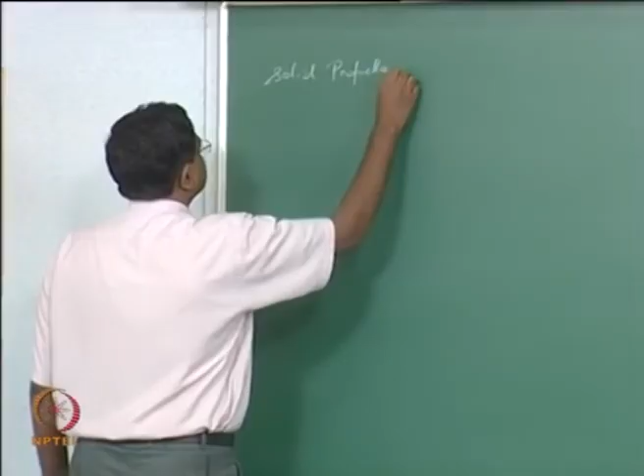The reason why we are going through all these things in quick succession is to point out that, as far as this course is concerned, whatever we have learnt on laminar premix flames and laminar diffusion flames is actually applicable, as we speak, in more complicated application oriented areas, except that the situation is complicated by a lot of other things.

For example, in sprays it's complicated by the spray statistics, the diameter distribution and so on. In the case of solid propellant combustion we will see what else happens, and then we will move on to turbulent combustion also, to show that the basics we have learnt will be applicable there, and how it's complicated by turbulence and so on.

So in the case of solid propellant combustion, what we need to understand is essentially we have to look at two cases. One is homogeneous propellants, and the other one is heterogeneous propellants.

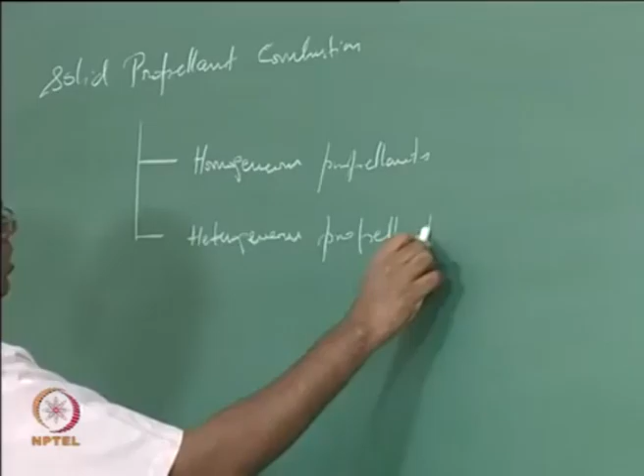The term propellant means that both the fuel and oxidizer are available in solid form together, and the question basically is to what level they are really mixed together. In the case of homogeneous propellants they are actually mixed up to the molecular level. So fuel and oxidizer are mixed at molecular level here.

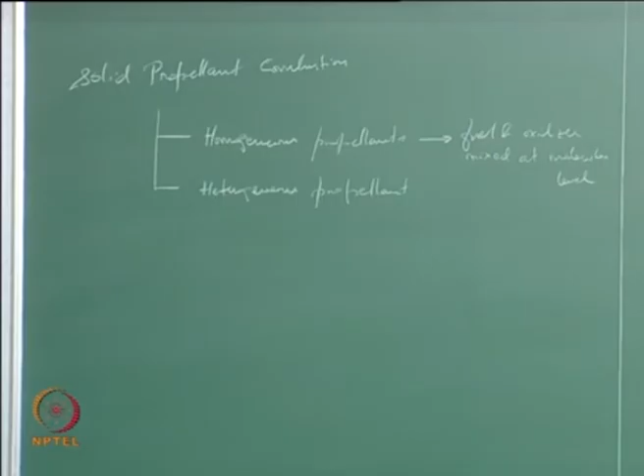That means when you have a source of heat that ignites it, and then combustion keeps going under steady state conditions, essentially what happens is the solid gets heated up and it is thermally unstable, so it decomposes into gas phase products. The gas phase products are essentially gas phase fuel molecules and oxidizer molecules, which then in turn break down further to react in a gas phase flame, and the gas phase flame releases a lot of heat that goes back to giving rise to the condensed phase decomposition products of fuel and oxidizer molecules in the gas phase. So that's how it happens.

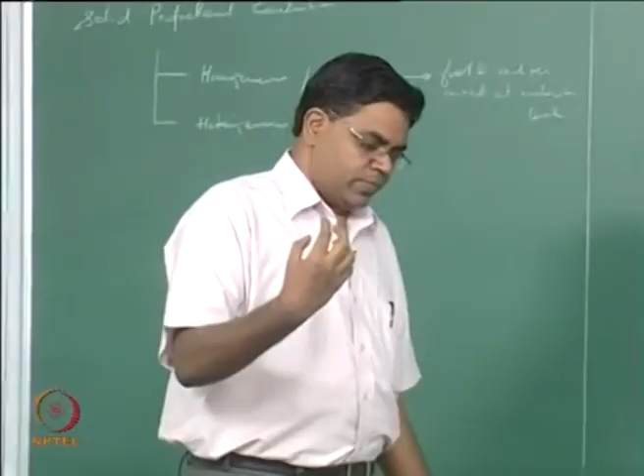As a matter of fact, when we look at liquid droplets, I also mentioned monopropellant liquid droplets, where you can actually have a premix flame surrounding the monopropellant liquid droplet, and it pyrolyzes the droplet, and the droplet decomposes into gas phase fuel and oxidizer molecules that react in the gas phase flame. So a similar idea essentially prevails for homogeneous propellants.

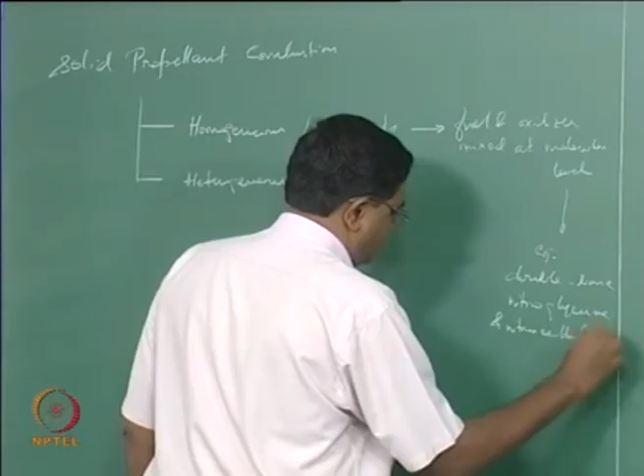An example of this, the most common thing, is what is called double base propellants. It's called double base because it's actually a combination of nitroglycerine and nitrocellulose. They are mixed together such that they form a mixture at the molecular level, and then they decompose into a gas phase fuel and oxidizer.

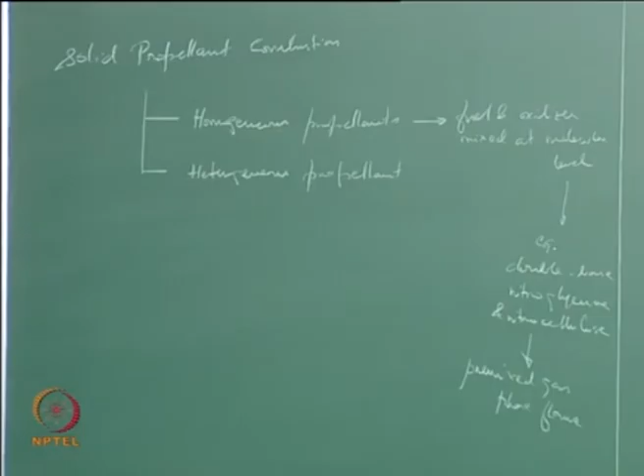On the other hand, before we move on to heterogeneous propellants, obviously what we are looking at here should give rise to a premixed gas phase flame, so you can think about a premix gas phase flame where the preheat zone now extends into the solid, because the preheat zone essentially is where the heat conduction happens, and the heat conduction now happens into the solid, heating it up from its initial temperature up to a surface temperature that needs to be determined.

This surface temperature is determined as part of the problem by supplying interface boundary conditions between the solid and the gas phase, and in addition you still have the same eigenvalue problem, which is to find out the burning rate of the solid, or the rate at which the surface regresses. That's essentially similar to the way we did the gas phase one dimensional flame structure analysis. In the case of heterogeneous propellants, essentially the fuel and oxidizer are mixed at a particulate level.

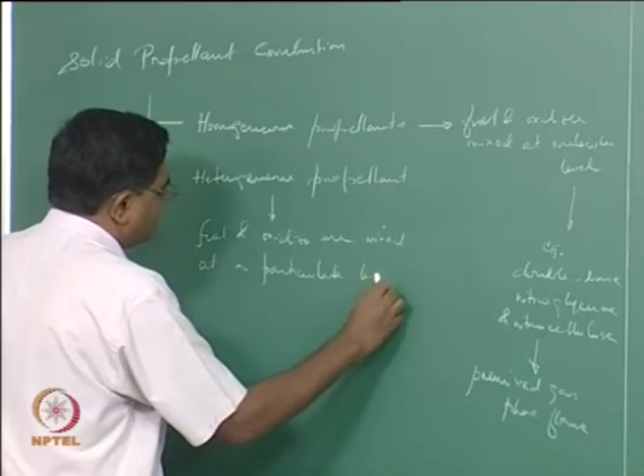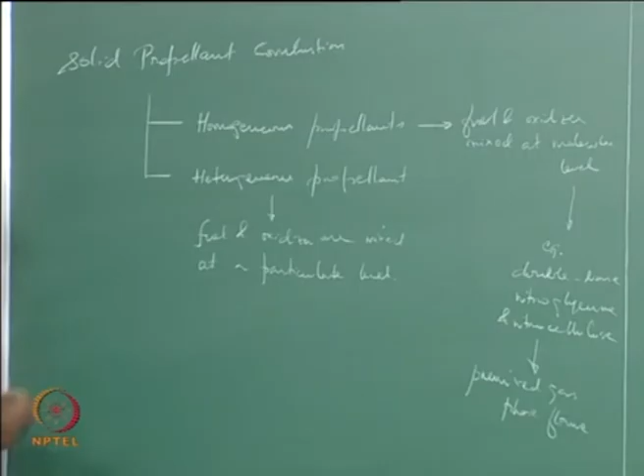That means you typically have - this is very typical, doesn't have to be followed exactly this way - a solid oxidizer powder, which is typically a chemical salt, and the most typical one we use is ammonium perchlorate. It looks like common salt particles, but comes in various particle sizes, and these particles are embedded in a polymeric fuel.

This starts out as a polymer that is a highly viscous liquid into which you mix things, and then you set this polymer to become a solid. So the fuel is essentially a polymer that also acts as a binder that binds the particles. You can also throw in metal particles as further fuel, but the metal combustion actually happens outside of the combustion between the fuel and oxidizer - effectively the binder and the oxidizer.

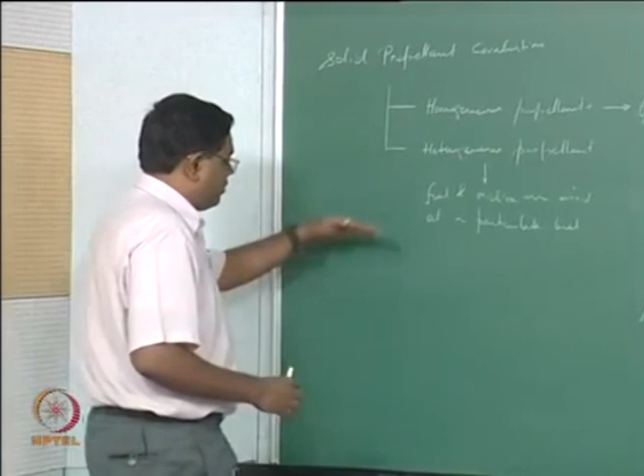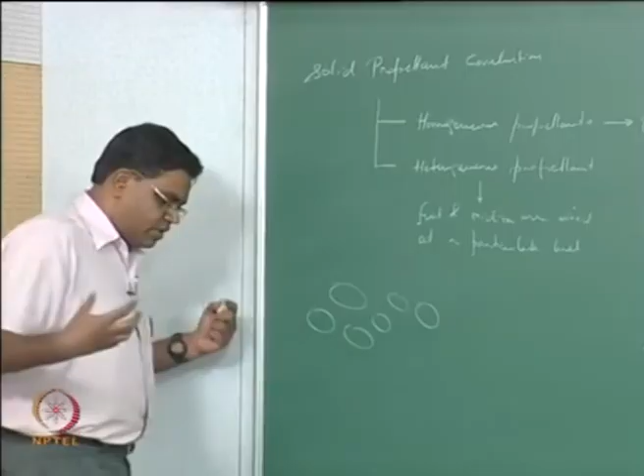So effectively what we are looking for is the combustion that propagates the flame into the solid, caused by a flame between the fuel and oxidizer. This will have a lot of solid particles, typically about 200 to 300 microns in size. Finer ones could be as fine as 5 microns or even 1 micron in extreme cases, but typically it's about 50 to 80 microns, maybe at most 100 microns. So essentially you try to have a very tight pack of a lot of large solid particles.

Then you try to pack further, in between the crevices formed between these big solid particles, with further smaller particles. So now you get these particles, and you have a binder that's binding the whole thing together.

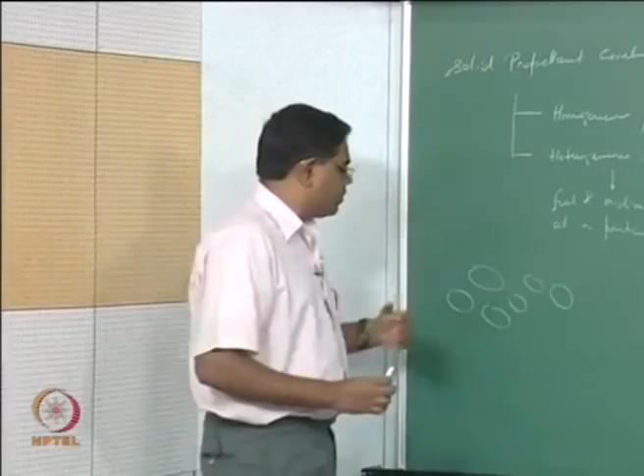So microscopically, when you have a flame that is trying to eat into this, it's obviously not going to be a premix flame. Even at the microscopic level, let's suppose we can hypothetically cut it with a surface like this, and say that is now the burning surface. Obviously the burning surface is not going to be as flat as this, and we will see how the non-planarity develops, but let's suppose this is what we want to think about.

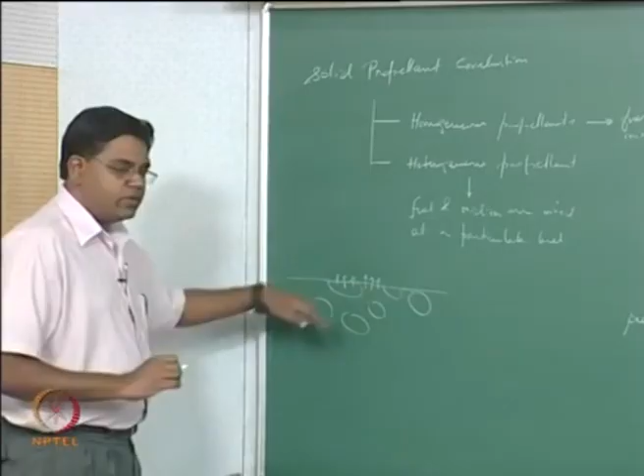Now you have an exposed area of oxidizer giving rise to oxidizer vapor, and an exposed area of binder giving rise to binder fuel. So let's say fuel here, oxidizer here, fuel here - if you look at it like this, within this region it's sort of like the inverse of the Burke-Schumann problem. The Burke-Schumann problem had fuel in the core and oxidizer on the sides, but if you don't care about exactly which chemicals are used, we're essentially looking at two different reactant species coming out in this fashion.

So we expect to actually have a diffusion flame associated with this. Recall we talked about flux boundary conditions, so we can deliberately discuss where exactly the stoichiometric surface is going to attach - is it at the contact between the oxidizer and fuel, or away? These kinds of issues remain to be discussed in these problems.

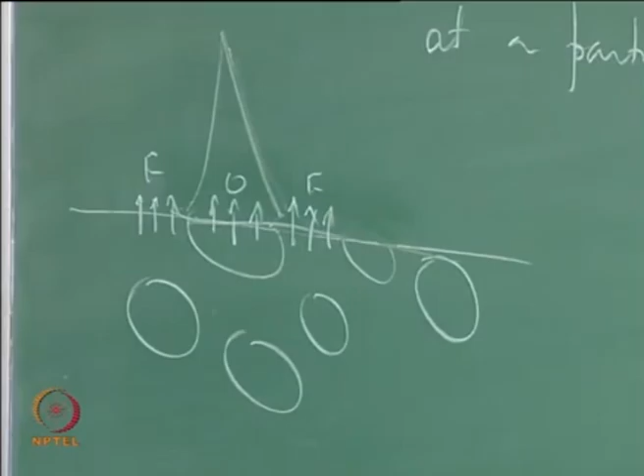But we also talked, when discussing diffusion flames, about finite chemistry effects, particularly near the leading edge, and found that we need something like a leading edge flame or a triple flame structure. That's pretty much expected in these propellants, because it turns out the oxidizer is actually a monopropellant by itself - it can burn on its own, but we need the binder to hold the oxidizer particles together and push it closer to a stoichiometric situation. Therefore you essentially have an oxidizer-rich reactive mixture.

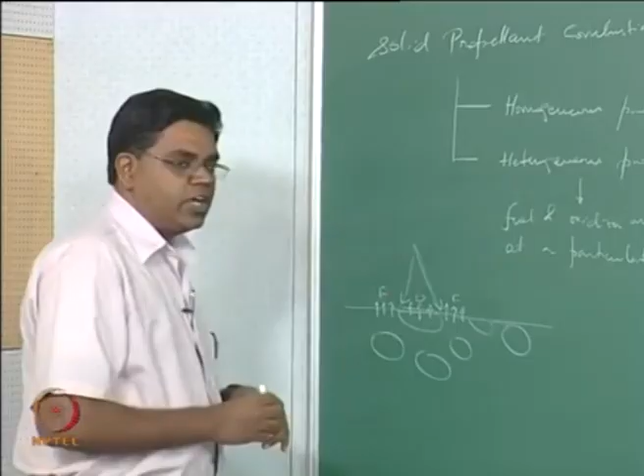In fact it can also go through a self-deflagration - you do have a self-deflagration flame of the oxidizer very close to the oxidizer particle, out of which you get oxidizer-rich products of this flame, which mix with the binder fuel gaseous species. Since you now have an oxidizer-rich species, you're going to have more like a triple flame rather than a diffusion flame that extends all the way.

So typically modelers have identified that you have a monopropellant flame for the ammonium perchlorate, then what's called a primary flame in the diffusion flame that comes from the triple flame idea at the corners, and then the trailing diffusion flame. So a typical idea of multiple flames prevails for what is called composite propellants.

Heterogeneous propellants are also generally termed composite propellants because they are a composite of particulates in a binder, similar to composite materials and structures. The popular idea is that you have essentially multiple flames of different structure that prevail on top, and of course, as I said, you also have aluminum metal particles that are embedded.

Aluminum is thermally very stable, therefore as it comes out it's going to accumulate on the burning surface because it is just barely getting melted there at that time. It is not ready to actually get evaporated.

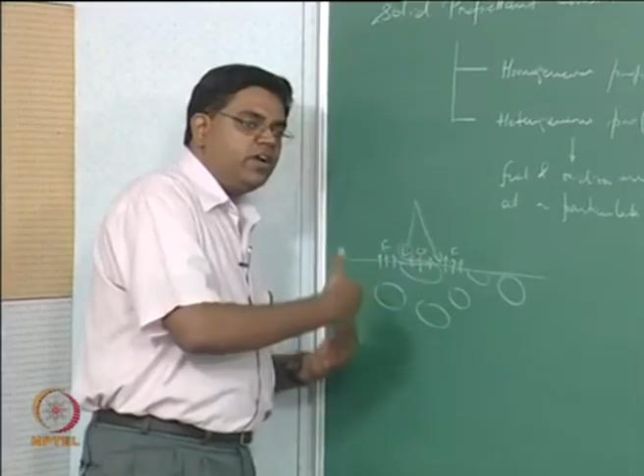So as it gets accumulated, it now forms a sintered web, and it's getting heated up by this gas phase flame complex, and ultimately it reaches an ignition temperature by which it gets ignited. Then the sintered web rolls out and goes up and starts burning as a bigger agglomerate than the individual particles we originally had. That's a complex problem with a lot of ramifications in solid rocket performance where these kinds of propellants are used.

All I want to point out is we have discussed many of these issues earlier on when trying to do laminar flames, and all these ideas actually remain here as well. So we now want to do a similar kind of overview of turbulent combustion.

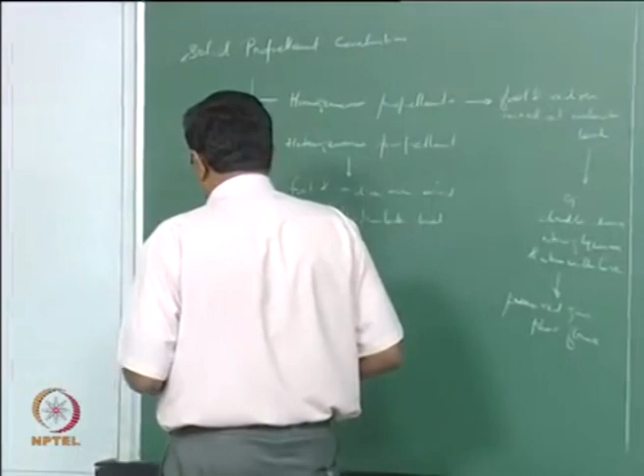To say that we want to just give an overview of turbulent combustion is extremely unfair, because it is a subject that has spawned a huge amount of literature. A lot of scientists have been working on it, and turbulent combustion is one of the things that has funded a lot of combustion research in the last many decades.

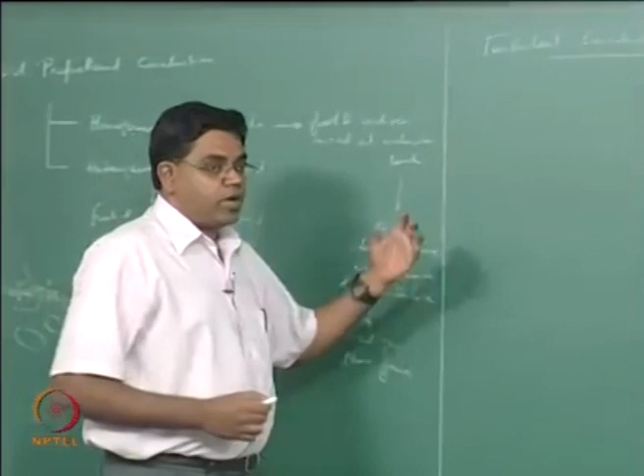That is primarily because most practical combustion, barring some things happening at very microscopic scales with very small Reynolds numbers, is turbulent in nature. So we are looking at gas turbine combustors, liquid rocket combustors, furnaces, boilers and so on. In most combustion situations you encounter, you have turbulent flow.

So effectively, here again, just like how we did sprays, first we have to get a hang of turbulent flows before we can actually get into the combustion.

When we did sprays, you remember, we had to first talk about spray statistics: how do you characterize sprays, how do you describe sprays, and then we worried about the combustion. Similarly, we have to go back a little bit and get a quick overview of what is turbulent about turbulent combustion.

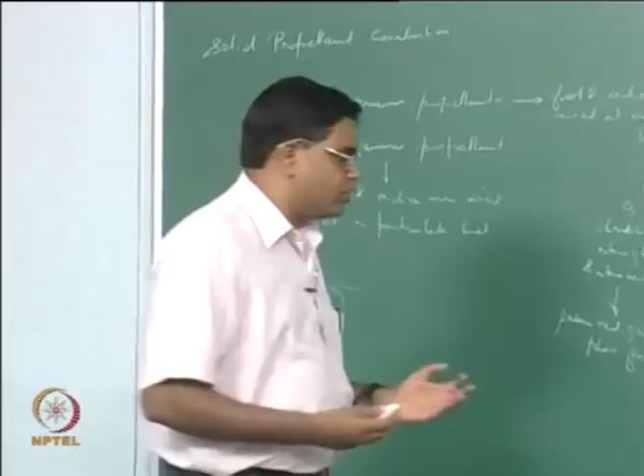So that means we have to look at what turbulence is in general. We will try to restrict what we are doing here to the context of turbulent jet flames. When I say turbulent jet flames, I will talk about both premixed flames and non-premixed flames, and let's see what that means.

So consider turbulent jet flames is what we want to do. This is very generic, because what you can think about essentially is if you now have a little nozzle from which a gas comes out at turbulent speeds, and it flows out like a jet, with a lot of eddies here and there. It's a caricature that I don't want to elaborate too much. So you now have a large turbulent jet.

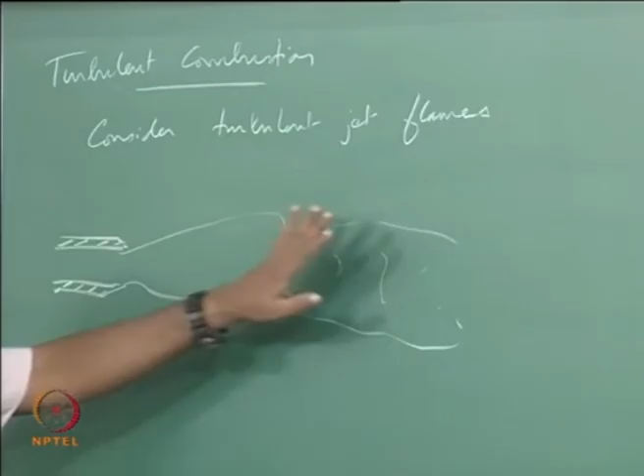You can think about this as coming out of a burner that is fitted to a combustor or a furnace and so on. This is a very practical situation that you come across in many applications.

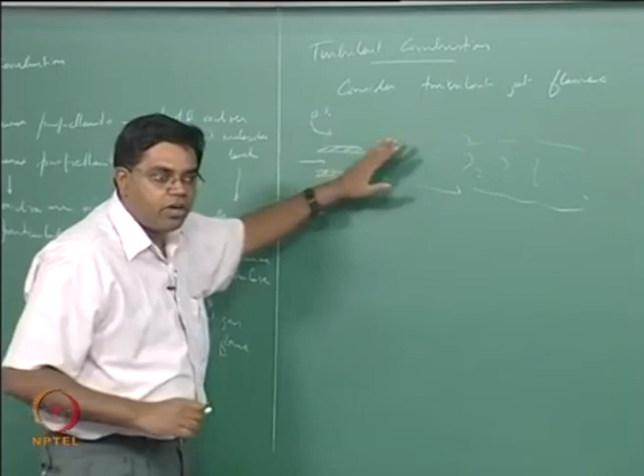When you say turbulent premix flames, you could think about a reactant mixture coming out here and then letting in air from the sides entering into the jet. Or if you want to think about a turbulent non-premix flame, you could say I have only fuel coming through this, entraining air around, and then you have a flame. So either way, depending on how that happens.

So if you now have premixed reactants, you're going to have a highly wrinkled premix flame that burns and consumes all the reactants within a very short distance.

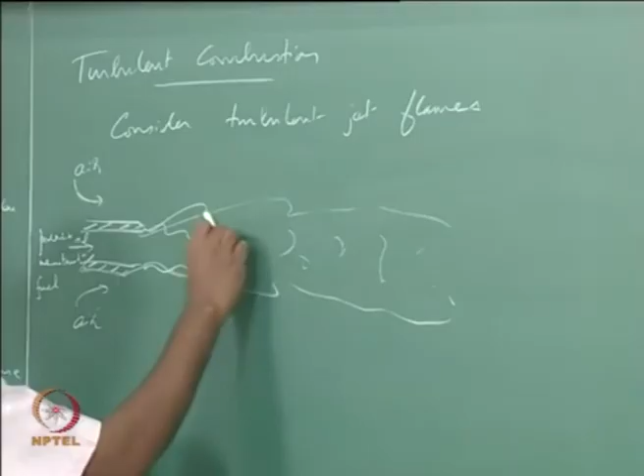And once again recall, if you now have only fuel, you're going to have a diffusion flame. The picture that I'm drawing there is essentially something like the stoichiometric surface.

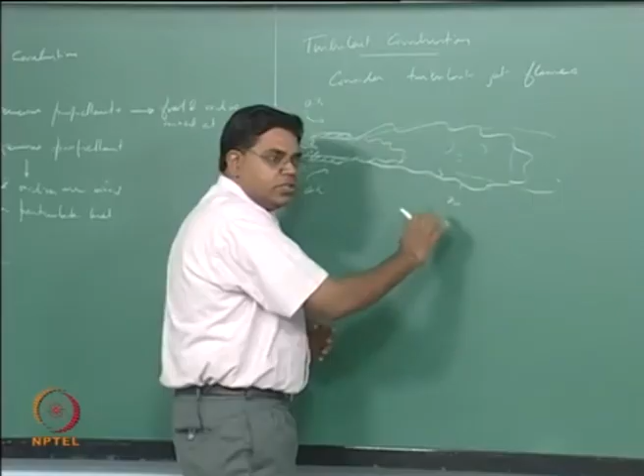Just like we did with the Burke-Schumann problem, if it's possible, mark the contour corresponding to the stoichiometric mixture fraction. You now get a turbulent flame. What's turbulent about it? You have fluctuations that keep happening, so the next snapshot won't exactly follow the same contour. This is an instantaneous picture, so each snapshot is slightly different. If you keep taking these snapshots and overlay them, you get lots of these curves forming a band, which is what you'd call a turbulent flame brush, causing a brush-like structure in an ensemble averaged manner.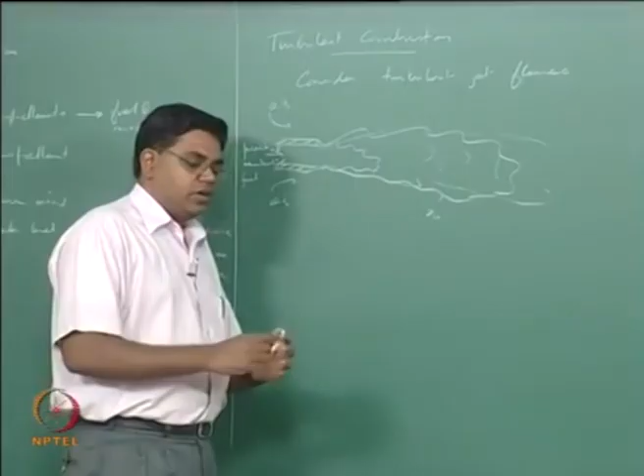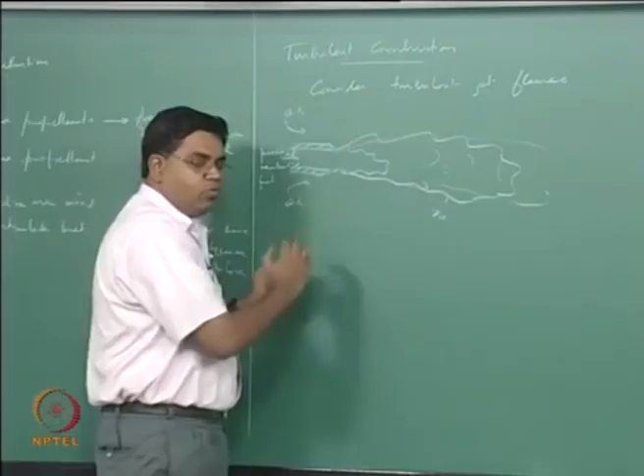Similarly for the premix flame, let's think about the laminar situation. We talked about the Bunsen burner experiment, where you have a hole at the bottom allowing air entrainment, setting up a premix flame, then gradually closing the hole to convert the premix flame into a diffusion flame. We find the diffusion flame is a lot taller compared to the premix flame. A similar situation exists for turbulent flames, because in diffusion flames combustion is diffusion controlled, so heat release isn't as intense since the chemical reactions are waiting for mixing to happen. Whereas in the premix flame, heat release is kinetically controlled, so you get a lot of heat release within a very short region. The volumetric heating load from a premix flame is much higher compared to a diffusion flame.

For this reason, for the same thermal loading - meaning the amount of fuel you're trying to burn at a particular rate - premix flames are typically very compact compared to diffusion flames. This is true in laminar as well as turbulent flows.

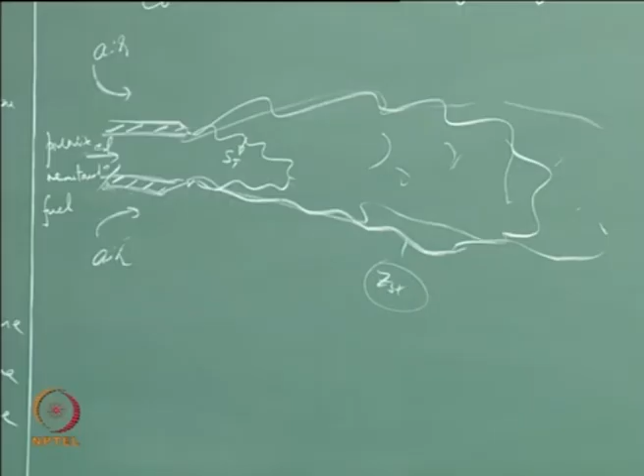If you want to think about how, just like the stoichiometric surface for the diffusion flame, you could think about a local turbulent flame speed trying to match the flow and set itself up. There we have a little problem: am I saying this instantaneous flame is traveling at a turbulent flame speed, or is it the turbulent premix flame brush that's traveling at a turbulent flame speed? So the notion of turbulent flame speed is a bit difficult to think about, and we'll have to discuss it in greater detail.

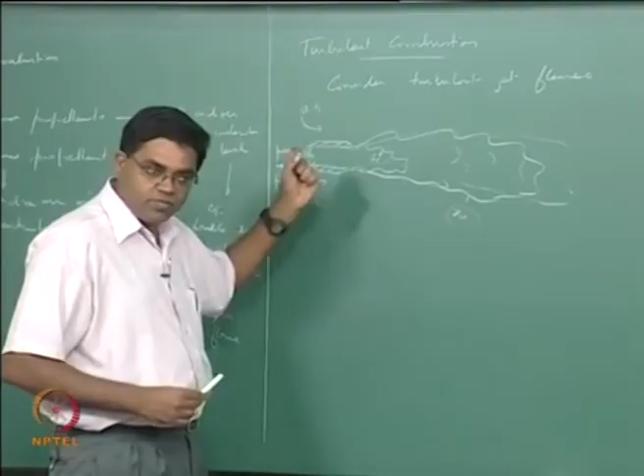The first thing I'm hinting at is that we will now have to talk about something called a turbulent flame speed, as opposed to a laminar flame speed. We got a hint of it when we used S_L, where L indicates laminar, and I pointed out that for turbulent flames we'll have to alter that. The point I'm trying to make is that the ideas we had - like the flame speed balancing the normal component of the flow - those ideas will remain. That is not going to change.

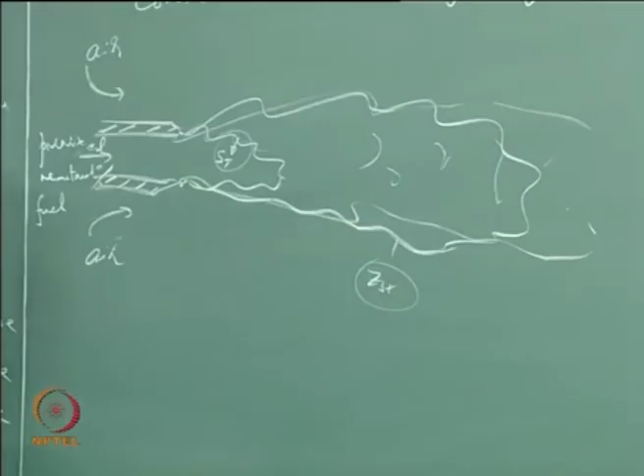So if we want to think about all this, the first thing to do is forget about the flames for a moment. We will now look only at the turbulent jet. For the sake of looking at the turbulent jet, let's not worry about whether this is premixed reactants or fuel - we'll simply say it's just a jet of some gas, maybe air itself, in a quiescent air ambience. That means you're essentially looking at a jet.

In the jet, you now have a region that's like an unsteady shear layer, where you have two mixing layers. We're talking about momentum mixing, species mixing, and thermal mixing if it's not isothermal. All these things are happening within this region in an unsteady manner. You could hope to view this part as essentially an unsteady laminar case if you're trying to resolve these scales in your computation or whatever it is.

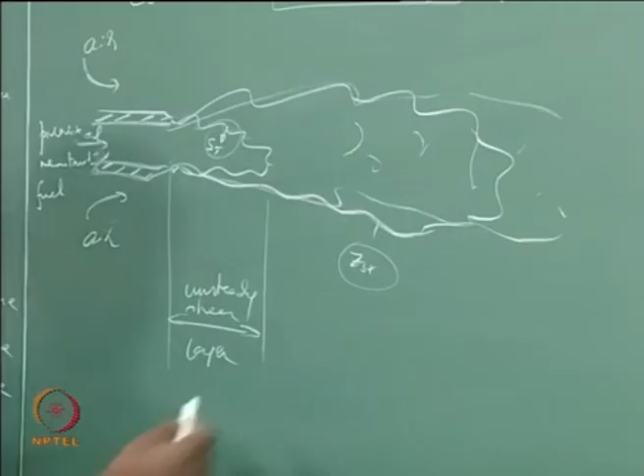But pretty quickly you're now going to get into a region where you transition to turbulence, and beyond this point you now have a fully developed turbulent jet.

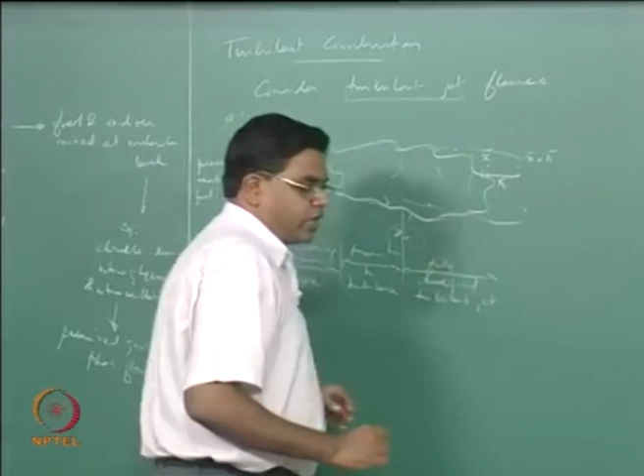When you have a fully developed turbulent jet, we are looking at a lot of eddies, which are primarily homogeneous isotropic. So we consider a point given by x and another point given by x plus r, distant r apart, then we characterize this by having a cross correlation between the two.

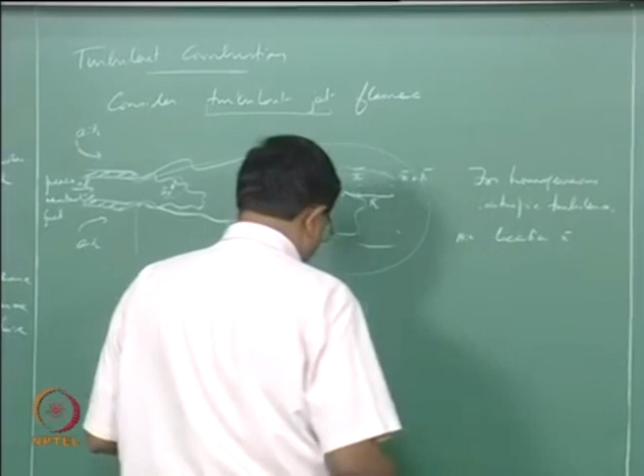Now if we're looking at this region of fully developed turbulence for homogeneous isotropic turbulence, the location x doesn't matter. Location x is arbitrary, and all you're looking at is essentially the actual distance rather than the displacement. So you don't have to look at this in vector form. The direction didn't matter because it's isotropic, and the location didn't matter because it's homogeneous.

Therefore, r can be replaced by mod r, which is simply r without the vector, and then what you're looking for is a velocity correlation.

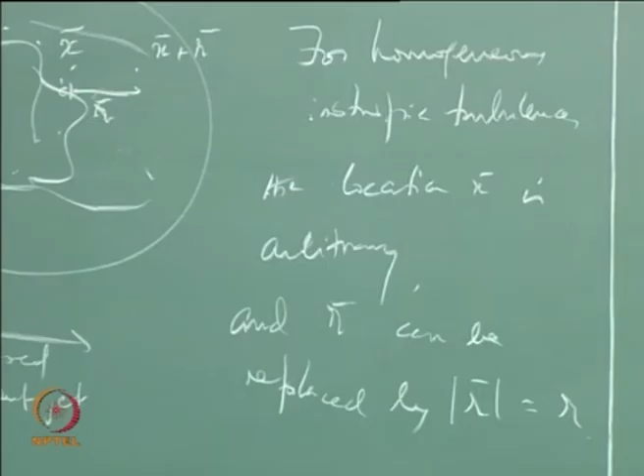So the starting point of thinking about turbulent flows is to think about a velocity correlation here, that is a spatial correlation. That means you're essentially looking at turbulent fluctuation at x comma t correlated with the turbulent fluctuation at x plus r comma t, as an average.

Then you normalize this. So the normalized correlation f of r comma t then is just take the correlation r and divide by the RMS, u prime squared t the whole bar.

And why are we bothered about this? Because we want to step into how this looks like. So if you look at how f of r comma t looks versus R, it's normalized, so we don't have to worry about the magnitude.

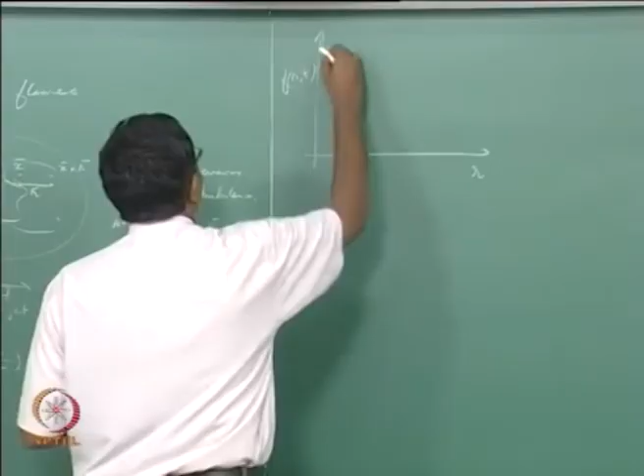It goes asymptotically to 0 as you go further out in R, and with respect to this we could say somewhere along here we have a length scale eta, which we call the Kolmogorov length scale, and somewhere in here we have a length scale L, which we call the integral length scale. We'll talk about these more carefully later.

But what I'm interested in is a function that approximates this to good measure, and that would be 1 minus 3/4 c over k epsilon r to the 2/3, where k is what is called the turbulent kinetic energy.

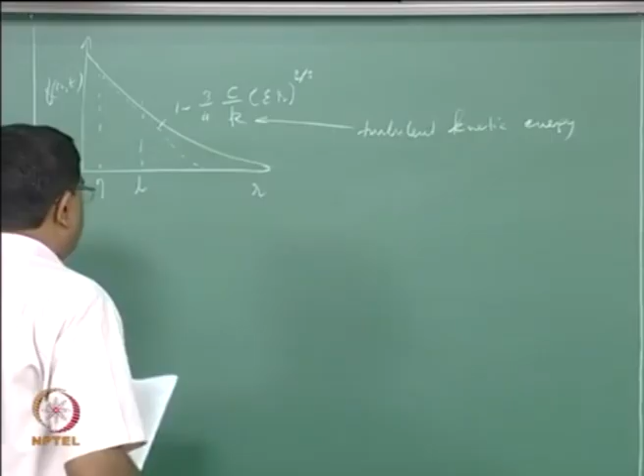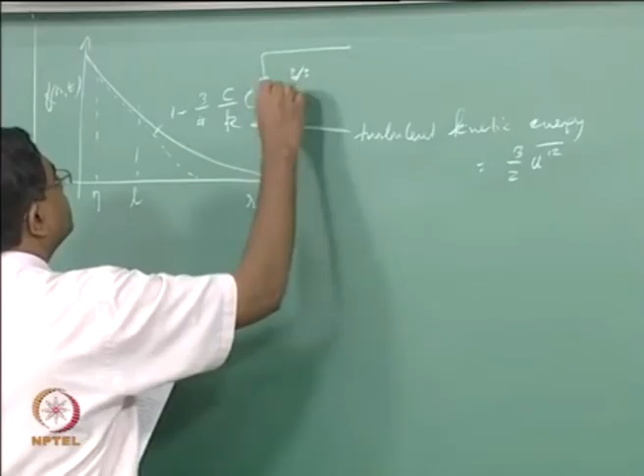For isotropic turbulence, this is equal to 3/2 u prime squared, where u prime is the fluctuation over the mean of the velocity, and epsilon is the dissipation, and c is what's called the Kolmogorov constant.

Kolmogorov constant, and then we want to talk about what is the integral length scale. Integral length scale L of t then is the integral from 0 to infinity of f of r comma t dr. That is essentially the normalized correlation integrated over all distance, and then you get a measure of a scale that captures the large scale structures.

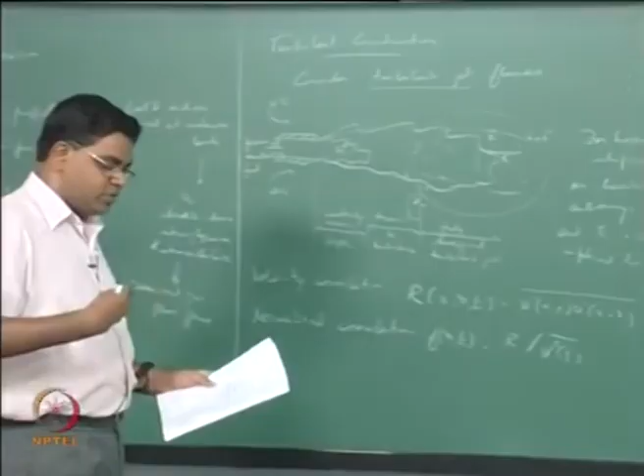We'll see what that means pretty soon. Then you have what's called the Kolmogorov length scale, which is the smallest length scale in your flow. Essentially what's happening is you have a turbulent flow in which you have a cascading that goes all the way down to the Kolmogorov length scale. So eta is nu cubed divided by epsilon, the whole to the 1/4, where nu is the kinematic viscosity, and epsilon is the turbulent dissipation.

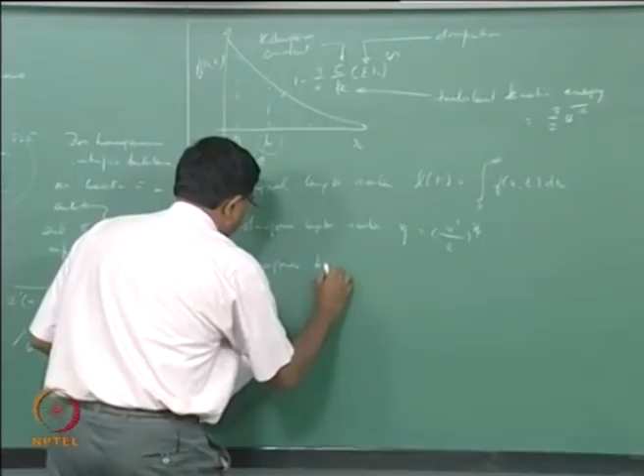We will also talk about a Kolmogorov time associated with the length scale, and we will talk about these time scales and length scales and the velocity associated with these for many of these scales, but at the moment we are discussing the Kolmogorov scale. So Kolmogorov time t eta is nu over epsilon to the half, and Kolmogorov velocity v eta is nu epsilon to the 1/4.

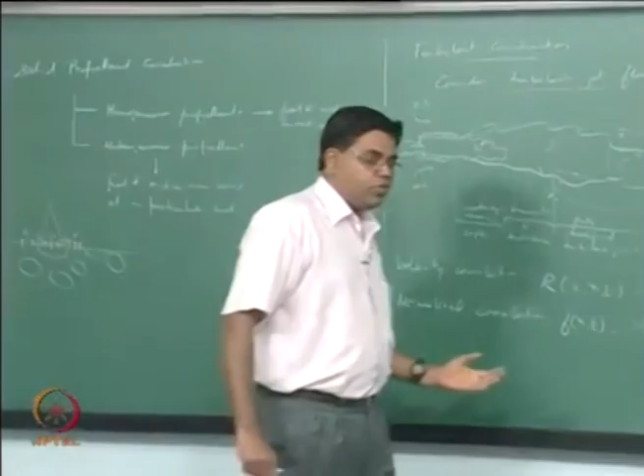Between the large scale and the Kolmogorov scale, we could now think about a discrete sequence of eddies, and the reason we are talking about these things is because ultimately we want to compare them with a laminar flame thickness. When we talk about combustion, we have length scales and time scales associated with the flame and the flame speed. So we want to be able to compare these scales with those of the flame, so we now talk about a discrete sequence of eddies.

Discrete sequence of eddies within what's called an inertial subrange. I'm going to explain this soon.

With the energy spectrum, but let's first, it's kind of like a chicken and egg thing. We first have to talk about the cascade and then the spectrum, or vice versa.

This is basically L divided by 2 to the n, where, until we reach eta, n goes as 1, 2, etc. That means for every eddy size, it's half the size of the previous, bigger eddy. Essentially that's how we keep on looking at a discrete sequence.

And what we can find out is that in this inertial subrange, the dissipation remains constant. You have a constant dissipation mechanism that works on these eddies.

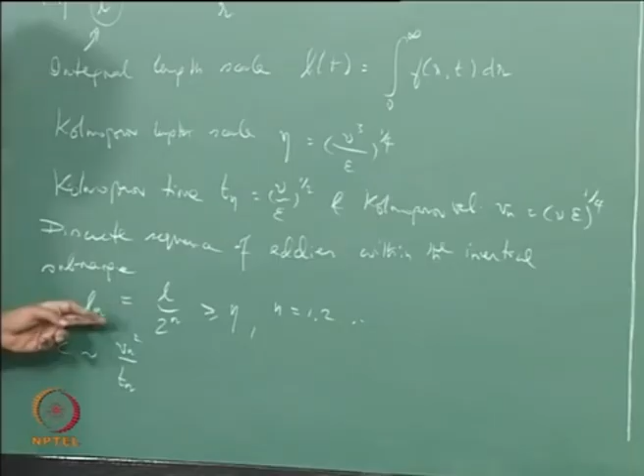Therefore we could say that epsilon is essentially Vn squared divided by Tn, where Vn is the velocity associated with the nth eddy, and Tn is the time associated with the nth eddy, and this would be the same as V eta squared by T eta, where V eta and T eta are essentially the Kolmogorov scales.

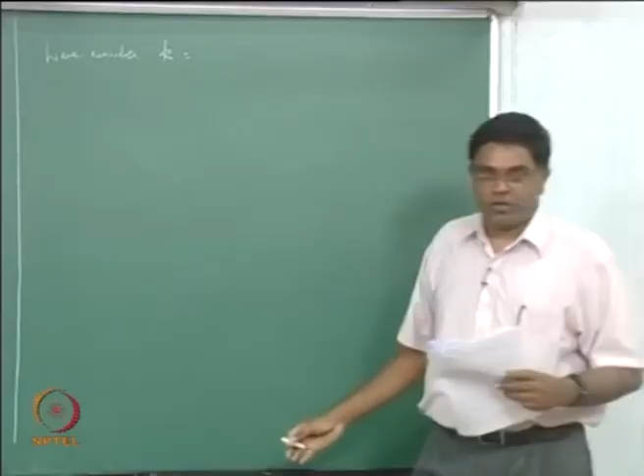Then the next thing we want to think about is what's called the wave number. For some reason the turbulence community is very fond of K, maybe because of Kolmogorov, they like Kolmogorov a lot, so they keep using K for the turbulent kinetic energy as well as the wave number and so on.

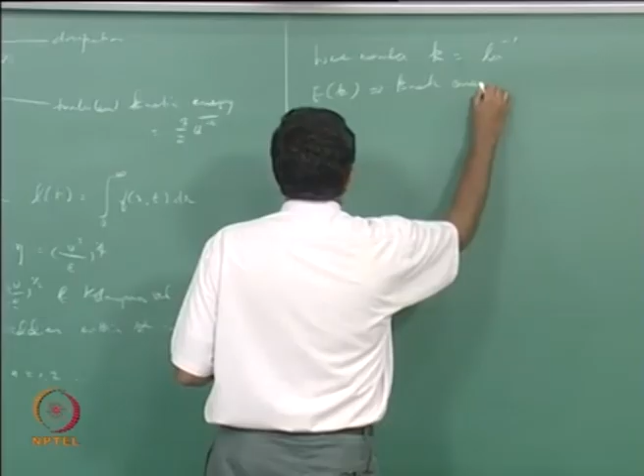So this is typically 1 over the length scale, and what we are looking for is the energy density, which is the kinetic energy density per unit wave number.

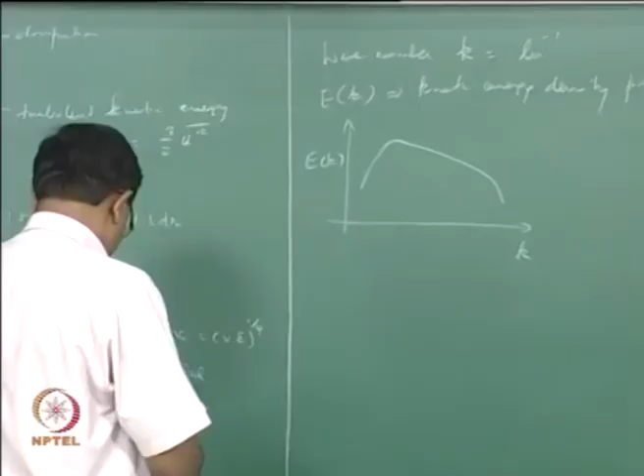So we can now think about a spectrum, right? E of k versus k, and usually we are looking at a spectrum that looks like this. You can now think about a division here where this is the large scale, and this corresponds to 1 over L, which is the integral length scale.

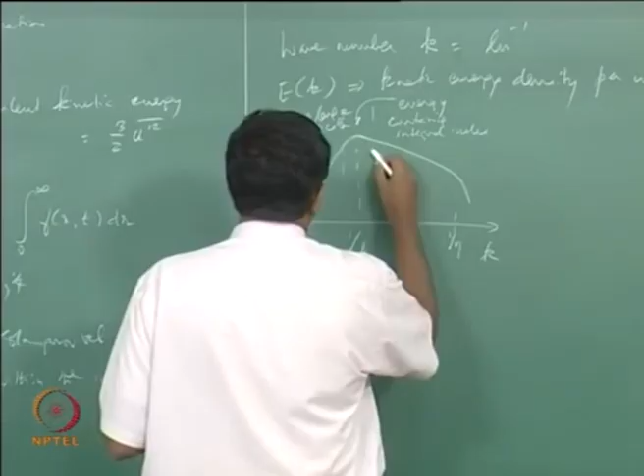And this corresponds to 1 over eta, the Kolmogorov length scale, and we are looking at this region as the energy containing eddies, or energy containing integral scales, and this region is now referred to as the inertial subrange.

Where you now have a constant slope of minus 5/3, that is a famous law there, and then below the Kolmogorov length scale is the viscous subrange.

So essentially what's going on is turbulent flows are of such high Reynolds numbers on the whole, based on the large scale, that you have a predominant inertial effect over the viscous effect as you keep going down to smaller and smaller scales until you reach the Kolmogorov scale, beyond which the viscous effects begin to be important.

So this is how this pans out. It's kind of like 10-15 minutes of turbulence, or less than that maybe, just about enough for us to think a little bit about what happens when you now throw in a flame on top of this. So then what we want to do is think about premixed turbulent combustion.

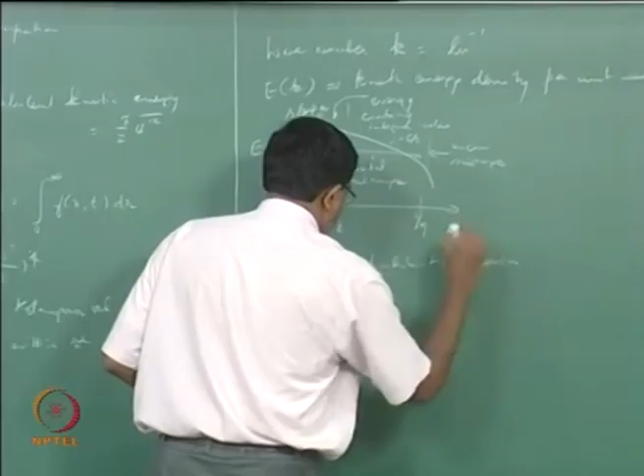Now the first thing I would like to point out as an empirical fact or an observation is that when you now have a turbulent flame, it propagates a lot faster than a corresponding laminar flame. How do I get there? How did I get to that point?

Essentially what it means is now you have a lot of these eddies in the flow that are trying to wrinkle or corrugate this flame, and you now have on the whole a flame that looks thicker and wants to reach ahead of itself. It's a very crude way of thinking about this, and we have to think in a more refined manner, but effectively it now gives rise to a larger flame speed compared to the laminar flame.

And if you now thought that the laminar flame speed under typical conditions is of the order of a few tens of centimeters per second, the turbulent flame speeds are about an order of magnitude more, so they actually are in the range of meters per second, right?

Still quite smaller when compared to most of the flow speeds that occur in a gas turbine engine. So if you think about a gas turbine engine, we're still looking at subsonic flows, highly subsonic - not supersonic combustion, maybe not in this course. We went through this long ago when we wanted to show that pressure remains more or less constant in low Mach number conditions, and the Mach number is of the order of about 0.1. Since temperatures are pretty high in the combustion zone, the speed of sound could be of the order of 1000 meters per second, so flow velocities are of the order of many tens of meters per second to 100 meters per second.

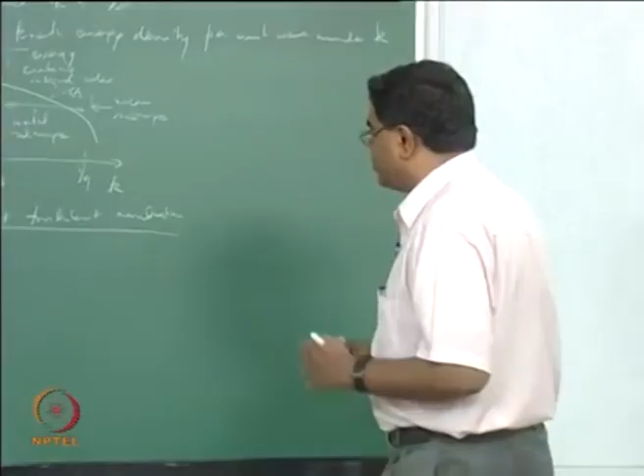So what happens in reality without having to average, right? What we want to do here is to actually look at the physics of what's going on instead of thinking about empirical correlations on how turbulent flame speed varies relative to laminar flame speed. That is for maybe a special course on turbulent combustion itself where you get quantitative about it, but here we just want to qualitatively look at the different regimes of turbulent flows.

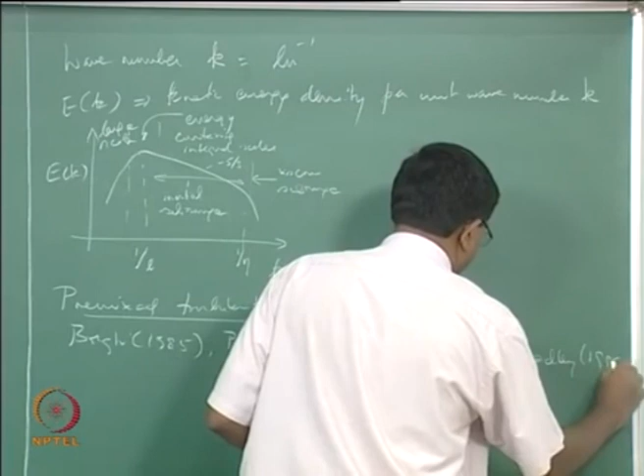So the idea of turbulent flame regimes comes from several investigators in the late 80s. The first of which is Borghi, 1985. In fact, early researchers used to call this regime diagram the Borghi diagram, but it's also been put forward by Peters and refined further, and Bradley and co-workers around 1989, and Poinsot et al. Many of these people are still active researchers in the community, so you can see this is not very old - it's only about 20 years old as an idea.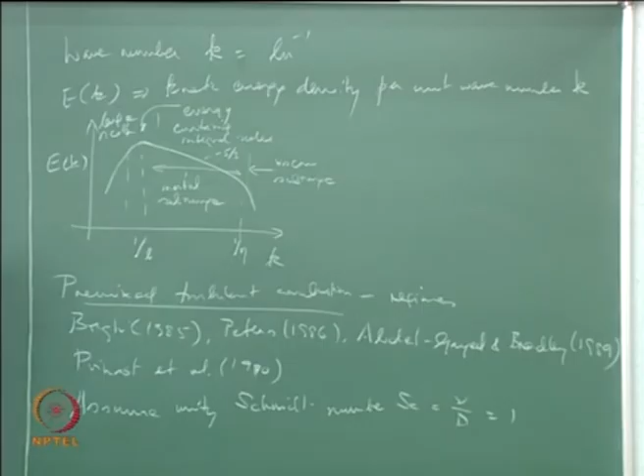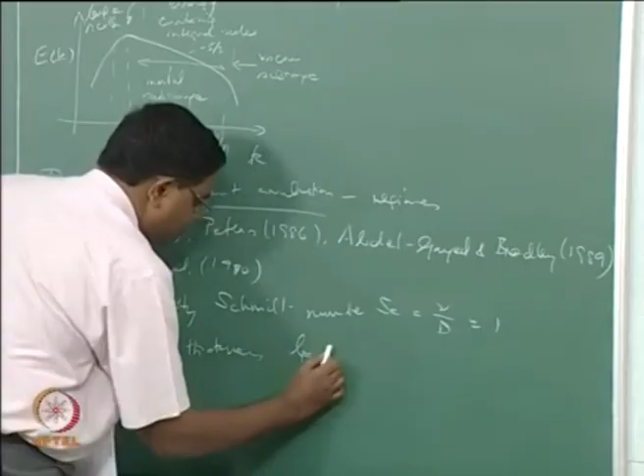So what we want to do here is assume a unity Schmidt number - that means we don't want to make a big distinction between viscous mixing and molecular mixing. So Schmidt number, which is nu over d, we'll now take as 1, and we go through a few definitions here. So define our flame thickness, LF (capital F) refers to flame, not fuel, and we will stick to this when we are doing diffusion flames as well.

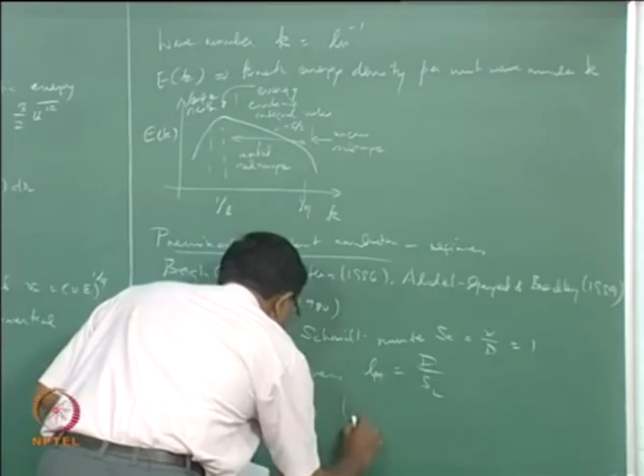Equal to d over SL, and using SL means we are actually thinking about essentially a laminar flame that is going through a fate of wrinkling and so on when subjected to turbulent eddies. We now want to construct an idea of what a turbulent flame looks like from essentially a laminar flame. So we use a laminar flame speed, and then have a flame time, TF, equals d over SL squared - an order of magnitude expression that you would get there.

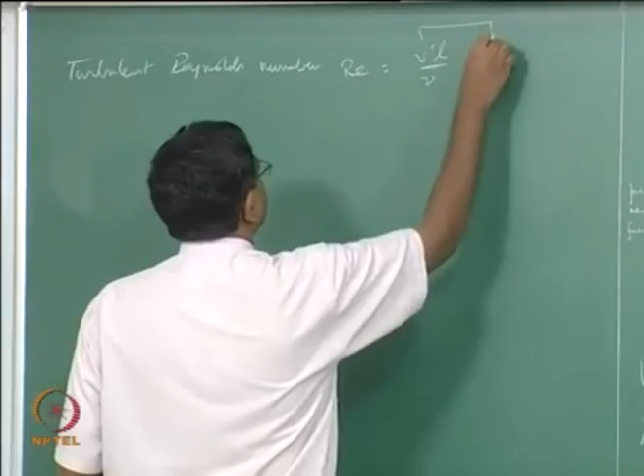So we want to define a turbulent Reynolds number, RE, equal to V prime L over nu, where V prime is the turbulent intensity, which is a measure of the fluctuation - the turbulent velocity fluctuation.

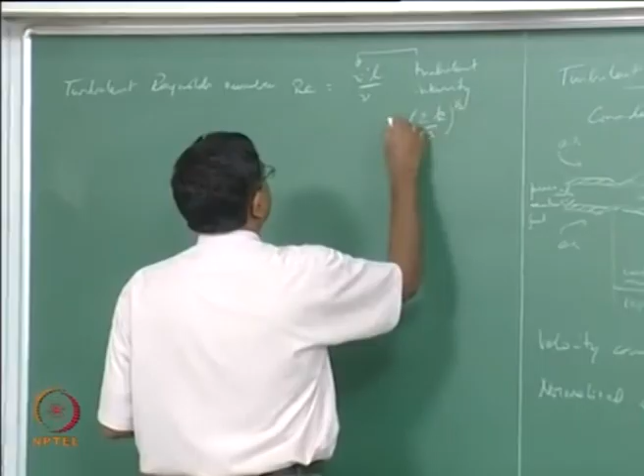It comes from how you can define your kinetic energy - you're looking at something like this under square root, which is basically 2/3 K to the power half. That's how turbulent intensity comes from, and L is of course the integral length scale, and nu is the viscosity. Since we are using Schmidt number equal to 1, we say this is actually V prime L divided by d, and we just define the flame thickness as LF equals d over SL.

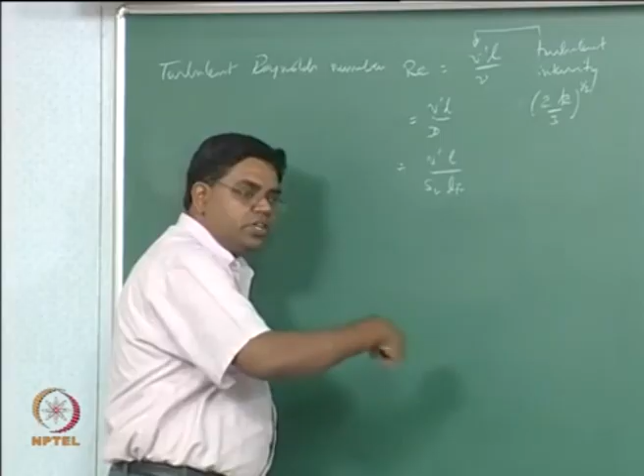So d is LF SL, so this is going to look like V prime L over SL LF. It's sort of like a velocity ratio times the length scale ratio, right? So the velocity ratio compares the turbulent intensity versus the flame speed, and we compare the integral length scale of the turbulent eddies with the flame thickness. I'm trying to implant this idea because that's the way we are going to think about this. The next thing we want to think about is a turbulent Damkohler number.

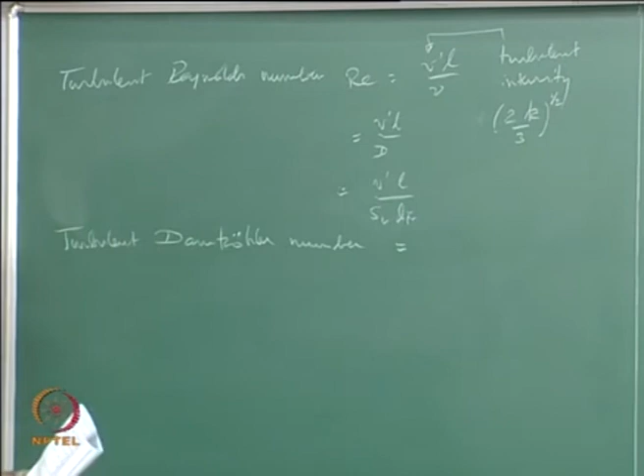Damkohler number is something we've come across earlier, which is essentially flow time by reaction time. It compares your flow time scale to the reaction time scale, and typically it's quite large because it takes a lot of time for the flow to make a significant movement, like over a characteristic length scale of the geometry, compared to the time it takes for the reactions to happen.

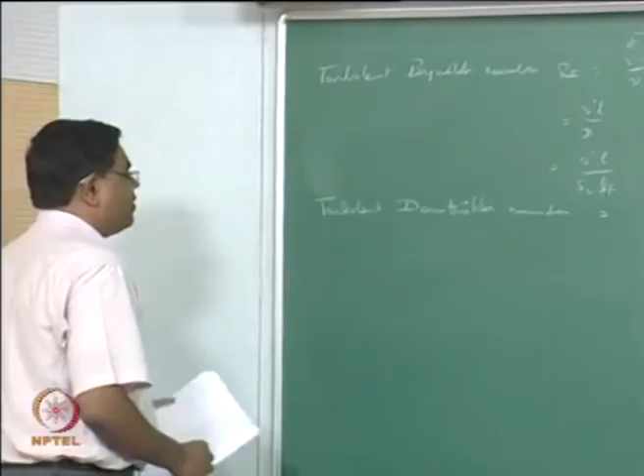So Damkohler number is defined based on this, but you'll find it's a little different from how Reynolds number turns out to be. This is essentially time scales, right? It's actually SL L divided by V prime LF, coming from L over V prime for the flow time, divided by LF over SL for the chemical time. So it's sort of like saying this looks like this and this looks like that. They look very closely similar, but they're not. So keep in mind, don't get confused about this.

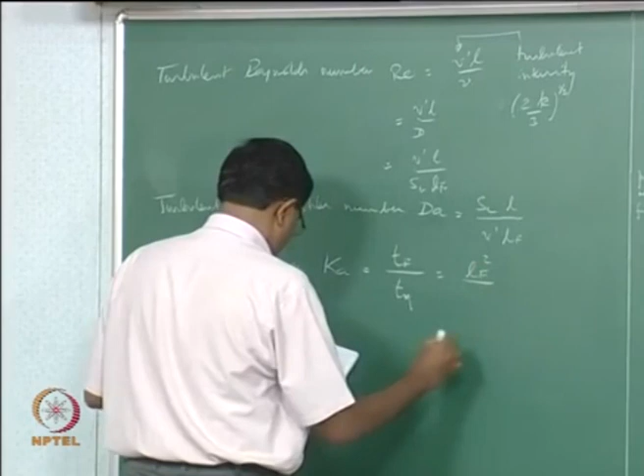And we now have a Karlovitz number, Ka. So Damkohler number has the symbol Da, Karlovitz number has the symbol Ka, which is effectively Tf, the flame time, divided by the turbulence time. You can say this is Lf squared divided by eta squared in terms of length scales, or Veta squared divided by SL squared, whichever way you want to say it. In all these cases we are basically looking at the ratio of flame scales to Kolmogorov scales, whether time scale, length scale, whatever, compared to Kolmogorov scales.

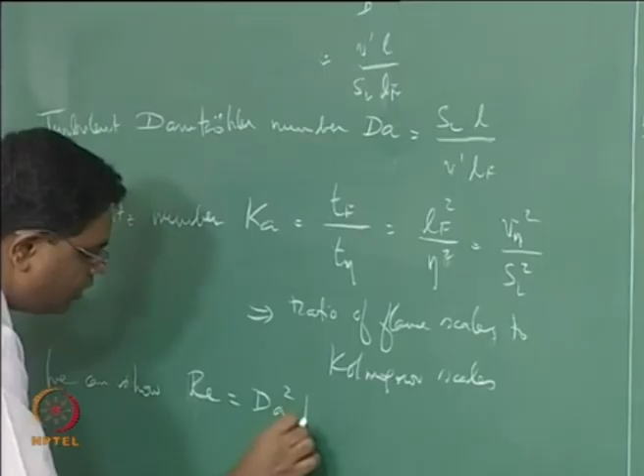And with these we should be able to show Re equals Da squared Ka squared. So that kind of sounds like Da is equal to square root of Re. So that's some way by which you could remember it.

Now, what we have been thinking about for a laminar flame is pretty much the same as what we thought earlier, which means it has a preheat zone and a reaction zone. The preheat zone largely makes up the flame thickness. For a typically high Damkohler number or high activation energy situation, your reaction zone thickness is quite small compared to the flame thickness itself, and it's given by what's called the Zeldovich number, or the Zeldovich scaling. So you can scale the flame thickness by the Zeldovich number to get the reaction zone thickness. We did this earlier when talking about laminar flames.

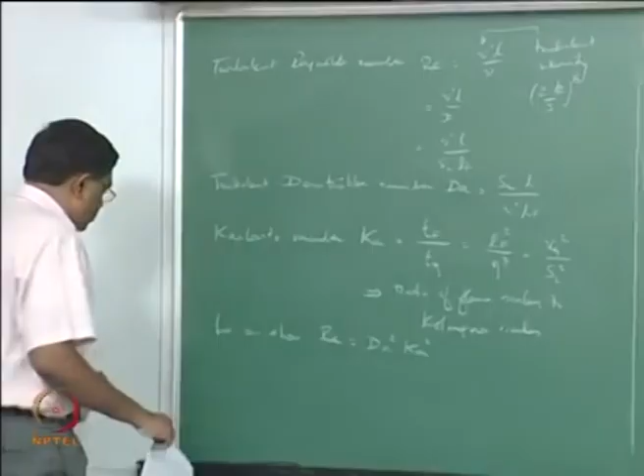So we can now form a second Karlovitz number based on the reaction zone thickness alone. The reason we're thinking about this is, recall we were talking about these things as well as the turbulence length scales, because we want to compare how the turbulent length scales are going to be relative to the flame thickness. You keep on changing your regime: first the turbulent length scales are typically much larger than the flame thickness, but as you change the regime, the turbulent scales become small enough to enter the preheat zone but not the reaction zone. And then ultimately can we get it even smaller than the reaction zone, and so on. So this is how we want to go through.

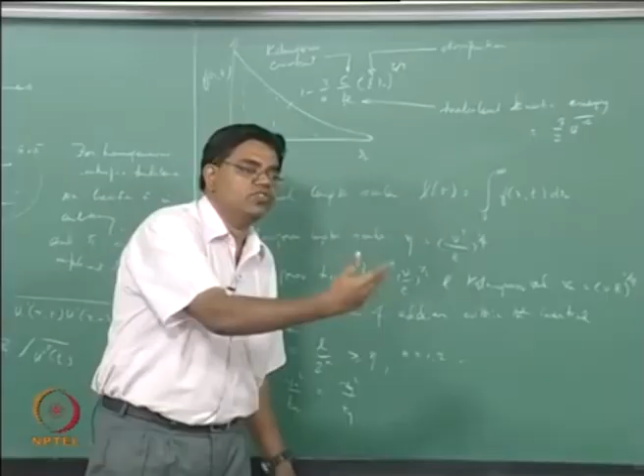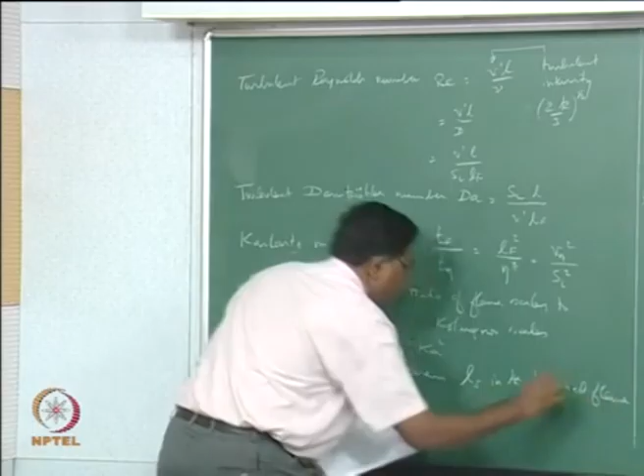So therefore we also want to keep track of the reaction zone thickness alone rather than just the flame thickness on the whole. For reaction zone thickness, L delta, in the premix flame, a second Karlovitz number, Ka subscript delta, can be defined as L delta squared divided by eta squared. We are still comparing this with the Kolmogorov length scale, and we can show that this is equal to delta squared Ka, where delta squared is essentially the Zeldovich scaling coming between the flame thickness and the reaction zone thickness L delta.

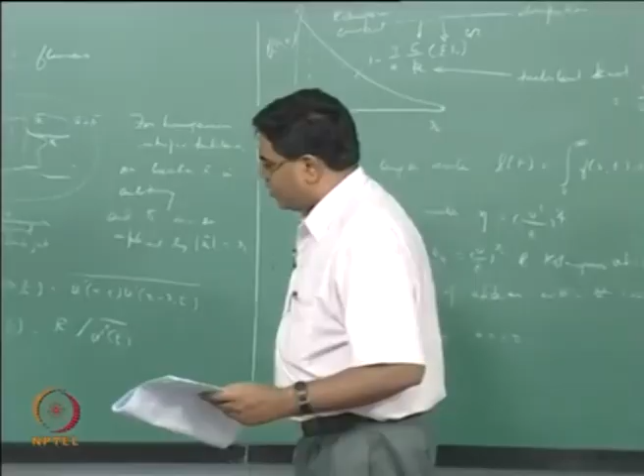We will just stop today with showing this, this is probably a good time to stop. I think we've finished these definitions, we'll pick up from here tomorrow.